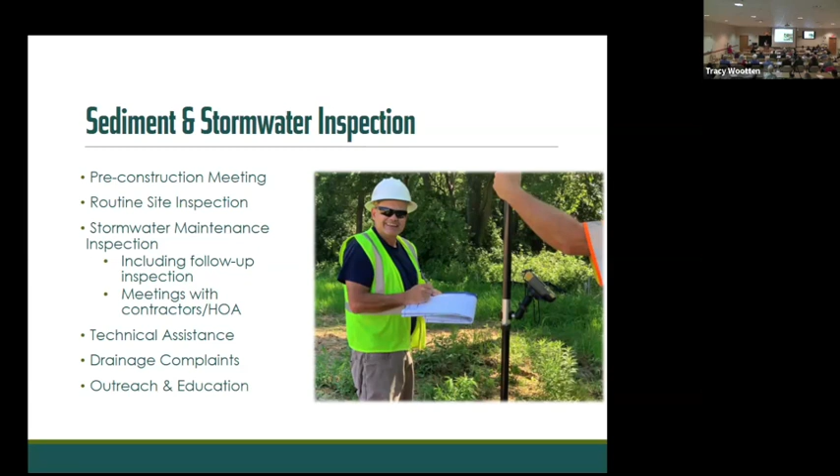And then, like I said, our involvement in a project is from that pre-construction meeting all the way to perpetuity, till we turn it over to you guys. But that construction process, if it's a commercial project, can be a couple months. Like if it's a convenience store, they're usually open in 3 to 6 months. It can be up to 20 years, because we have some projects like the golf course resort communities. I mean, we're still inspecting those projects because they're not fully constructed. And there's different stages, from that initial bulk grading all the way to just building single family homes, but we're still a resource going out there inspecting.

So stormwater maintenance inspection. We don't actually know the total number of stormwater facilities, but we have about 3,000 closed out projects throughout the county, because we're going from 1991 to now inspecting all of those projects. So we're obviously not going to all of these stormwater facilities because we don't have the resources to do that. And honestly, our maintenance inspector is wearing a couple hats at the moment. And so if somebody calls and requests that we do an annual inspection, Buddy Griffith, our maintenance inspector, will come out, we'll do an inspection, and provide you a report.

But really, we encourage you to have a pond maintenance company overseeing that, providing routine and preventive maintenance to you guys, because they're going to be able to monitor it and reach out to us if they have questions. If anything happens, we can come out there and meet with them or a community and discuss what the concerns are.

So there's different types of stormwater facilities. Obviously everybody knows the wet pond, which is just that: a pond that has water in it. But there's also dry ponds, infiltration ponds, bioswales, bioretention, filter strips, even stormwater facilities that are underneath parking lots. So along Route 1, where real estate is very expensive, that Route 1 corridor between Lewes and Rehoboth has the best infiltration in the state, sandy soils, because it's beach. So for a lot of the outlets and different commercial projects, their stormwater is underneath the parking lot.

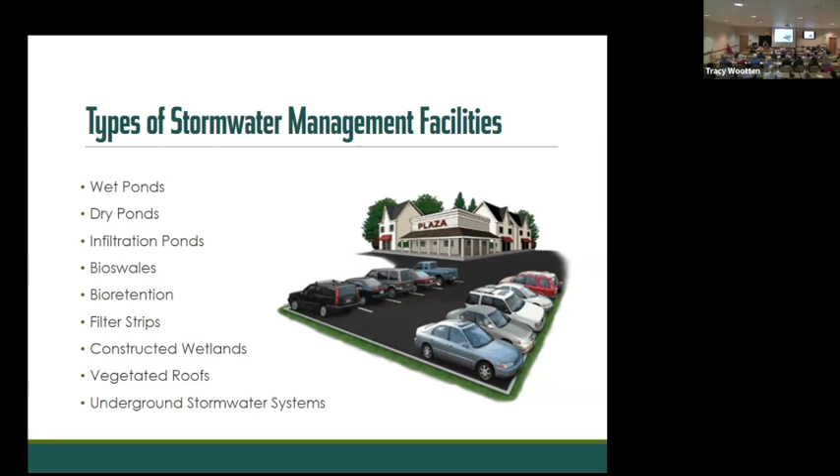So, because a lot of people say, well, I don't know where their stormwater is. Well, it's underneath the parking lot. So there are many different types of stormwater facilities, even vegetated roofs. If you've been to Bethany Blues in Rehoboth, they have a vegetated roof. So there's lots of different ways to comply with the stormwater regulations.

So the first one we're going to talk about is wet ponds, which is really, I think, what most people see in their community, because it's a selling feature. It's an amenity. They need the dirt for the project. So you will have stormwater facilities and they need to comply with the regulations, which is why the pond is there, to mitigate that land use change. But they don't have to make it a wet pond.

Some areas of the county where we have a high water table, Bethany, Millville, Ocean View, you have limited options because groundwater is so high. So in those particular areas, you're pretty much always going to have a wet pond. Rehoboth, Lewes, we have areas with good infiltration. So you could have an infiltration or a dry pond, but a lot of times you'll see the wet ponds just because I think it's more of a selling feature. So how does the pond work?

So a lot of people call us about swales, roadside swale communities. We don't actually have authority over the swales in your community. Most of the roads in Sussex County are privately owned roads, meaning the county is going to inspect that road to comply with county standards. And then once everything is done and they've signed off on the developer, it gets turned over to the community. It is then your road to privately maintain, and that includes the swale system.

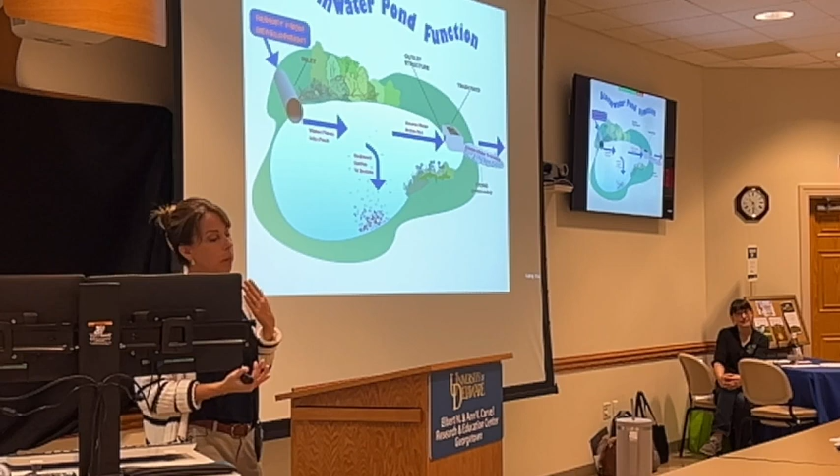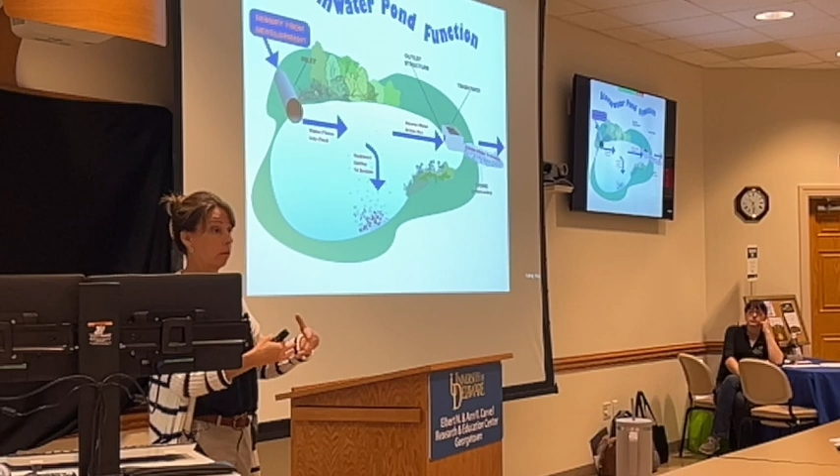A lot of communities are like, I paid for a premium lot view. I want this fountain running. The fountain is not working. I can't see the water. It starts to draw down. So people put pond wells in to regulate a permanent pool. They can do that. There's nothing in the regulations to prevent them from putting a pond well in, where they can have a well that maintains the water, but it shouldn't be going above this low flow orifice. But that also means, if they don't have it regulated, where it's kicking on when it drops low, does that make sense?

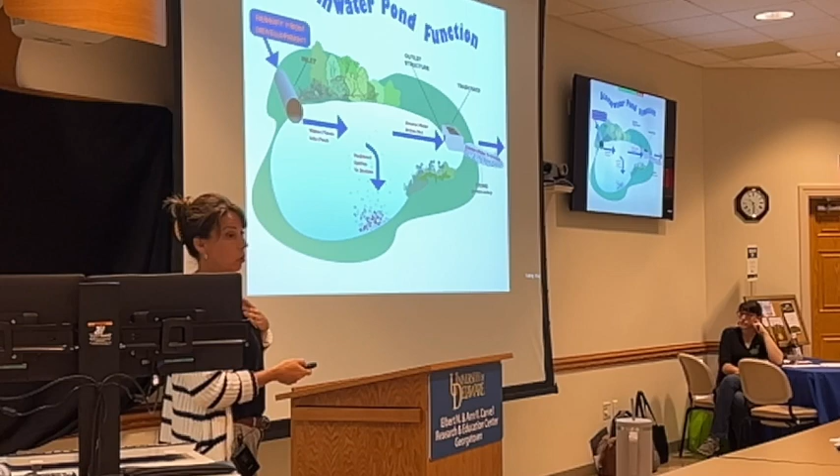Then it's constantly flowing. Because I have some communities that have it connected to their irrigation system, and so it runs just like the irrigation system runs every day, whether it rained or not. And that's really an abuse to the whole intent, and it's changing the hydrology on the receiving end. But that's why people put them in, to maintain the fountains. They want the water view. And it's not something we regulate. So if you call me and say, hey, my neighbor keeps turning the well on, unfortunately, there's not much that I can do with that individual. I just have to educate people, please don't do that.

And so for stormwater maintenance, we kind of talked about the importance of making sure that this outlet structure, so when you go to do an inspection, or if you're walking your dog around the pond or in the area, always look for the outlet structure. It could be a weir wall, just a concrete spillway, or it could be a structure that looks like this, just a concrete box. And there will be openings on that box.

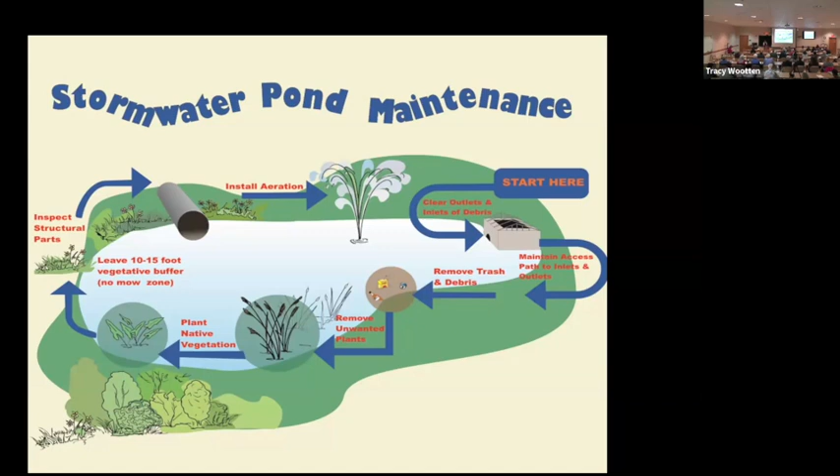Okay, so other things for general maintenance: always look at the outlet structure, always look for debris and trash, maintaining access, no trees around these areas, unwanted vegetation, native plants. We definitely want the buffer; I'll talk about that a little bit more. Monitoring for invasives, always looking for erosion. Our soils here are highly erodible, and catching that early is very important. So routine maintenance.

So when we go out under the stormwater regulations, I'll be honest, in DNREC's world, they don't really care if it's pretty. It just has to be there. It has to function correctly, be vegetated, non-erosive, and in good working condition.

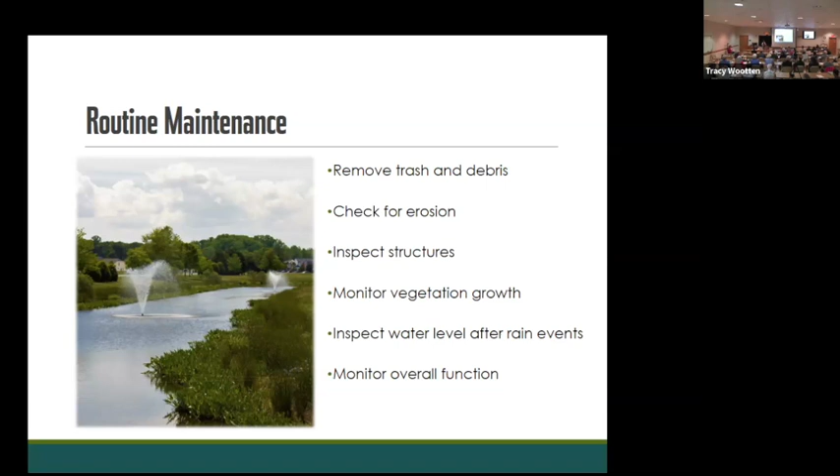But it's not the level of expectation that I think a lot of communities want, because the people will say, well, I picked this lot because they told me there was going to be a fountain. Fountains are not required in the state regulations. Enhanced vegetation is not required. Flowering vegetation is not required. So there's a lot of things that a lot of developers are doing to enhance it, to sell lots. We want that enhancement because we have healthier habitat. So we also are trying to encourage those to do it, but it's not always a developer responsibility.

So removing debris and any kind of trash, those really windy days that we have. If anybody lives in a community that still has active construction, you know what I'm talking about. It would drive me crazy. But if you live in a community where there's houses under construction, we'll get those windy days and that trash is going to go somewhere. We just have to make sure that it's not going to block any kind of pipes or structures. And then we've got the human factor of people trying to do things themselves. So really just keep an eye on your stormwater facilities.

Having a fluctuating water table is not something that's regulated. We talked about that a little bit with the wells. When we have a wet pond design that comes through the office, they have to demonstrate to us how that pond is going to hold water, either naturally or they're going to have to line it. So when a project is submitted to us, there's detailed soils investigations required to demonstrate: will this pond just have groundwater, seasonal high, or does this pond require a liner because it's not holding any water without the liner? So all of that is determined at plan review.

Excuse me, I have another question. Yes. Regarding the evaluation of the soils at that engineer design stage, are those soils subject to being brought in from another site to, in effect, create a liner that would otherwise be, I guess, a rubber or plastic liner? They can do that. So for liners, let's just say that the soil borings come back and they're like, this pond is dry, that's never gonna hold water without a liner.

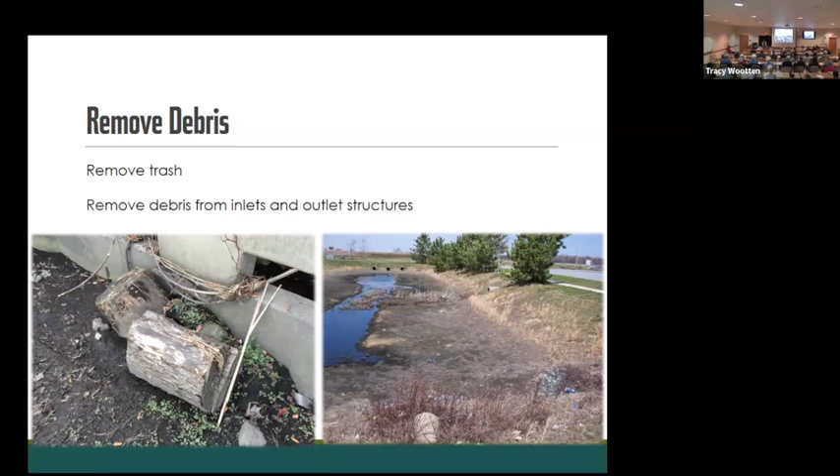Yeah. And then there's certain roads with DelDOT, and I don't know all the ins and outs with DelDOT, but certain roads, depending on that classification, like Route 1 would be one that I think is designed not to flood for like the 50-year. So there's certain roads that they don't want water on for certain storm events, and I don't know what all of those classifications are, but you can have water in the road. During a 100-year storm, you will have water in roadside swales temporarily until it recedes. Yep. Thank you.

So again, trash and debris, if you live in an active construction community or are adjacent to a commercial project, you're going to see construction debris, unfortunately, or trash. You're going to see trash. And then it's windy here at times. So being mindful that it doesn't lodge into any outlet structure is huge.

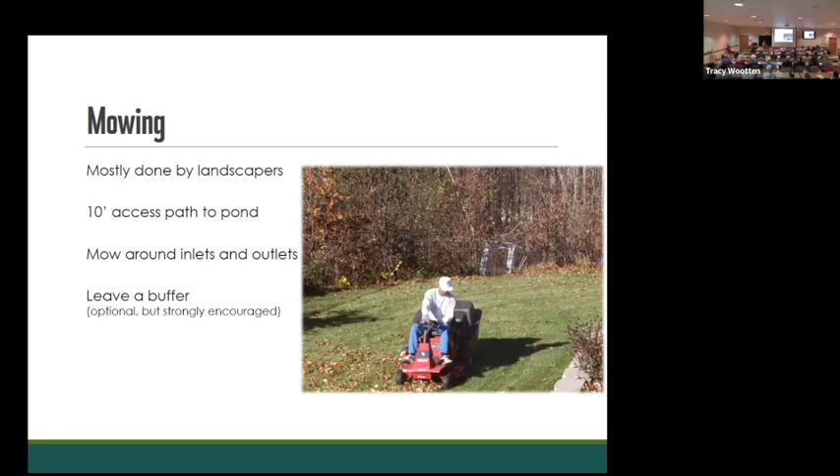Also for any stormwater facility, whether it's a wet pond or not, mowing where the outfall structures, inflow pipes, concrete pipes, outlet structures are, making sure that those areas don't have any kind of woody vegetation. You don't have to mow it on a regular basis. It's just enough where any kind of tree sapling growth is cut. Because you don't want big trees. And the longer you wait for a tree, the more expensive it's going to be to remove it. So if you can catch it early.

Now, this is the big question in a lot of communities, to buffer or not buffer. This is the saga that has continued forever. From the conservation district, we will always support the buffer. The wider you are willing to allow that buffer, the better. Our soils here are highly erodible, so if you mow this on a regular basis and you do not have irrigation, you will have erosion.

That is a guarantee. Just look at this past month, I don't know if we've had any rain this past month, and if that was still on your regular mowing schedule, those pond side slopes, those sandy soils will erode, and you'll start to see where the mower has scalped it. You'll start to see those kind of patches on the stormwater facility. So really, you want to have those areas as no mow, or mowing less frequently.

And even some communities have gone to the extent of enhancement with flowering vegetation, and talk to these guys here that are with us today. Create that pollinator habitat. Granted, I realize it's expensive, but you don't have to do it all in the first year. You guys can budget this stuff. This is really what's ideal. And we've got some communities who've done this.

We have one development that created extensive buffers, no-mow areas. They actually have meetings in their clubhouse with beekeepers. They have a group of beekeepers that comes. I mean, that's full circle. That's what we want, is to take these stormwater facilities, which are there to manage stormwater runoff so that we don't increase flows downstream. They're also there providing water quality, but they are also habitats. And they're supporting ecosystems, and we want to enhance those and educate everybody on the importance of doing this.

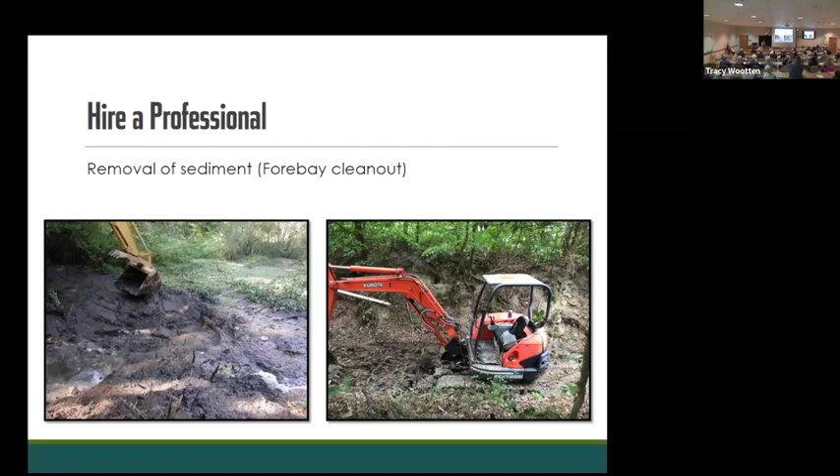So when to hire a professional? I have a lot of communities that call and say, well, I used to do this in this state or that state. Really, you should make sure that you understand the regulations here locally, and not applying pesticides. I had one person who was trying to treat mosquitoes with bleach. I had one person sucking up some kind of small toad, I forget what they're called, with the shop vac. Please call somebody, and know when to hire a professional. Having those licensed individuals come in and know what type of chemical to use, the appropriate equipment to use, and then reaching out to agencies who can help.

This is another big problem that we see in a lot of communities. We'll see these sinkholes. I don't know if anybody in here has seen one in their community. Typically it's where a storm drain pipe will separate from either another pipe or from a catch basin, and you start to get that sinkhole where they keep putting dirt in and it keeps disappearing. Those are things that are pretty common.

Please contact our office or contact a contractor to come in, and you're going to have to fix it. Usually they excavate it out and make the patch and fix all of that so that there's no seepage, water getting through those structures.

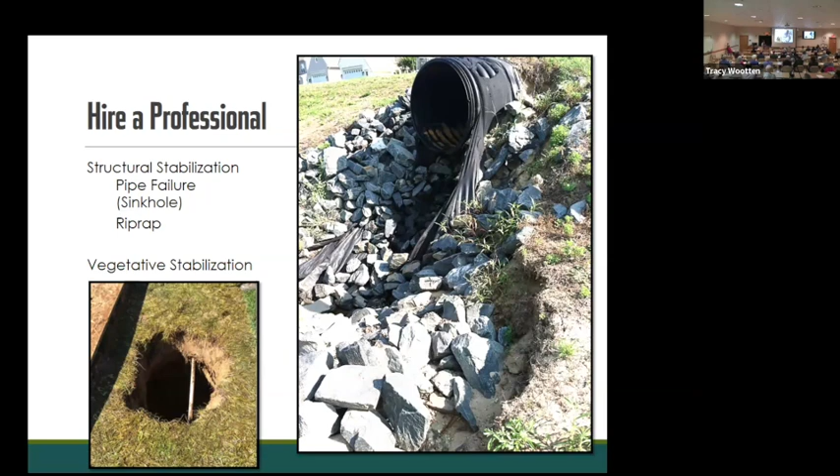Again, erosion is a big thing for us. If you get a storm event that exceeds a 100-year design storm, you're going to have erosion. If there was some type of small erosion there that has started, it is not going to get better. It's not going to fix itself. It will only get worse and get more expensive. So there's significant price tags with all of that. The longer you wait, the more expensive it is. So always take a look at things. If you start to see erosion, like I said, it doesn't get better.

Mosquito control, this is another complaint we get a lot, whether it's the swales or the stormwater facility or their backyard. Mosquitoes are going to be with us forever. It is a free service. They're out of Milford, so we just recommend communities contact them about spraying. I know a lot of the stormwater facilities get stocked with the mosquito fish. Talk to these guys about that as well.

Again, vegetation. For identifying, I use a plant app, which I think is amazing, to identify a lot of things when I don't know what something is. It'll tell me if it's invasive or not. But also you can take samples, and I think, Tracy, they can bring it here, right? And you guys will identify it. Or reach out to your pond maintenance company to see if this is something that's taking over and needs to be managed.

And again, the state regulations don't talk about this. They don't say, hey, you have algae and you have to treat it. They really just talk about the ponds being there to provide quantity and quality treatment because of the land use change in the watershed. They're not really talking about the aesthetics or the enhancement. These are things that we're looking to you guys, as stewards of the land, to take over and enhance and work with experts to do.

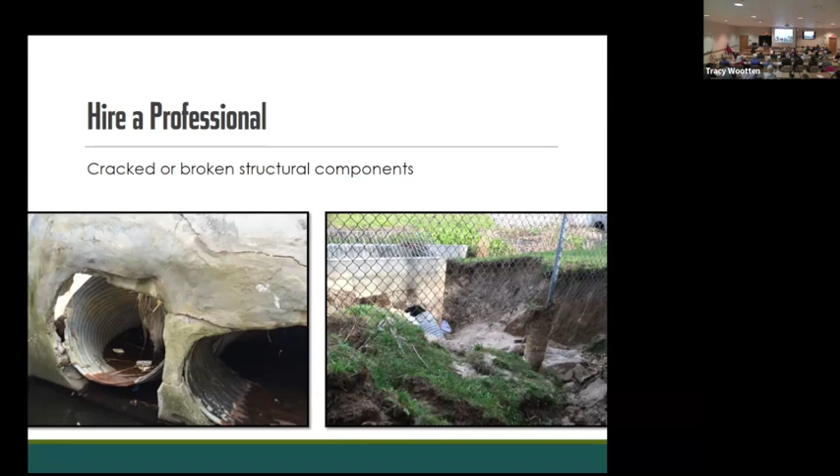So again, hire a professional. I would hope people's stormwater facility would not look like this, forgotten forever. Even vegetation, this didn't have that peaked rack, it was flat, but this can seal off and prevent water from leaving. If the water can't leave, it's going to flood internally. Your roadside swales, storm drains, if the water cannot go out the outlet structure, it's going to back up into the community. And that's what we don't want.

This one, we found it has a low flow orifice in the front, and I think it had a trash bag or something lodged in it. The top of the structure is typically the 100-year overflow. When engineers submit plans to our office, they have to run the 2, 10, and 100-year storm, and typically the 100-year is always the emergency overflow.

Sometimes you have a spillway also, but you can look at this picture and say, I have no capacity in this stormwater facility, because the water is essentially 2.5 feet above where it's supposed to be, which means I have no storage in this entire system for any storm event, because it's going to flood back. So these are things to be very mindful of. The other thing that this does, yes.

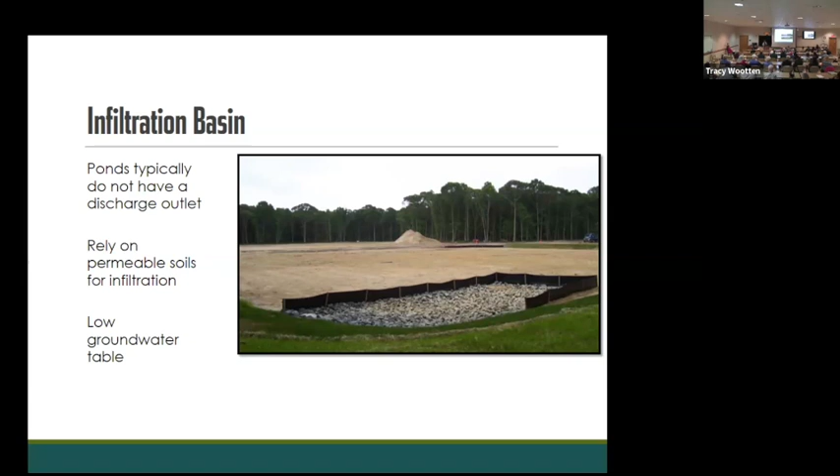But when they're designed, there's all kinds of soil borings that tell us, hey, the seasonal high groundwater is 2 feet below the bottom of that facility. They have to meet a certain infiltration rate. So there are definitely state regulations with certain design parameters required for that type of stormwater project.

Again, this is another type of infiltration facility. I like them planted myself. So I encourage people to plant them because the roots keep the soil more porous and they also take up some of that water. Some areas it's just beach sand, depending on where you are, and it just doesn't support good vegetation.

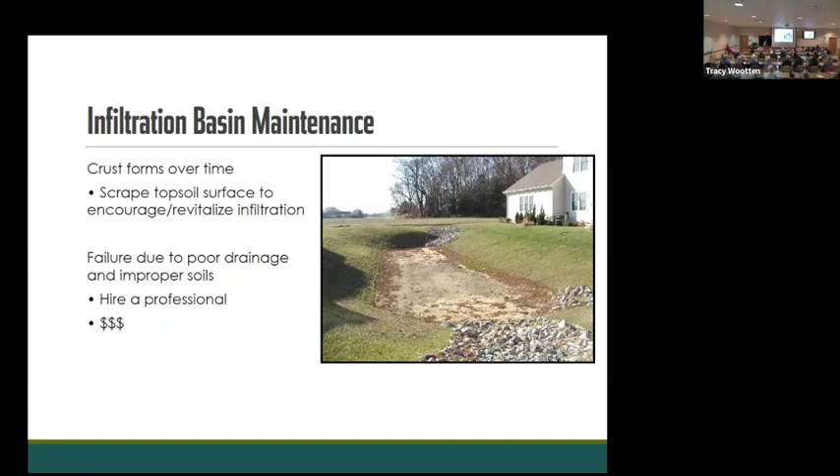Other types of stormwater facilities. We don't have authority over the roadside swales in the community, but every now and then you'll have a swale between the lots that might be pretty substantial. And this is a stormwater feature. They're called bioswales, so they're a little bit different. They're not your roadside swale. They're typically between houses or at the end of a cul-de-sac. They're usually used for filtering runoff for a small upstream drainage area.

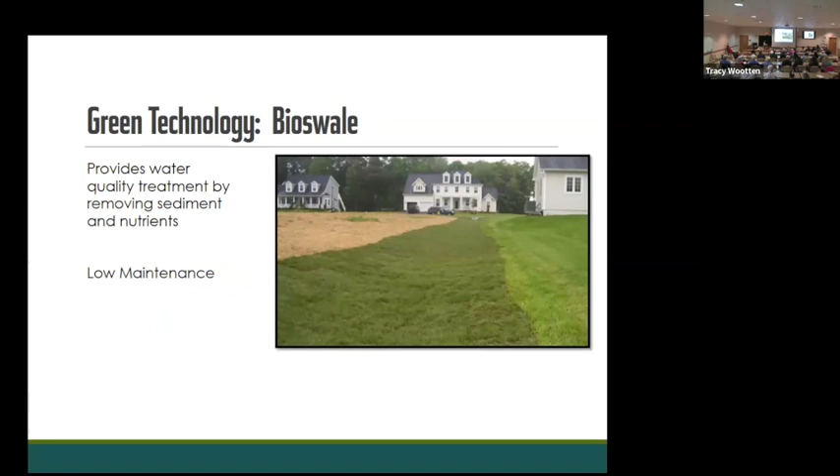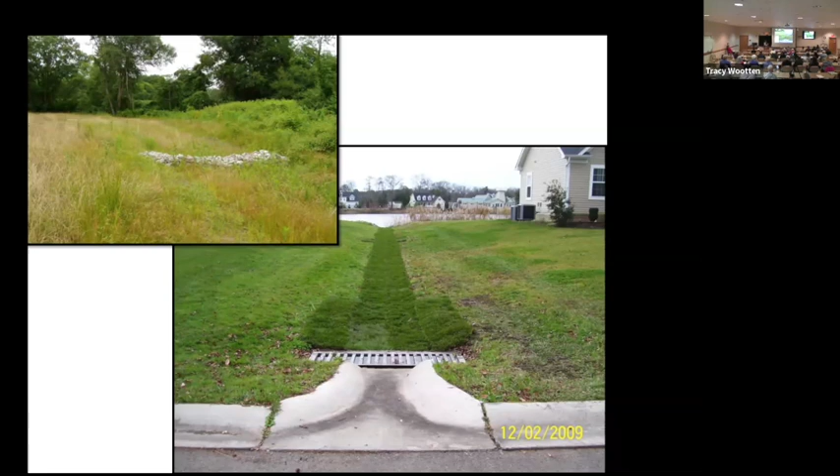And again, this one's between 2 houses. We try to encourage people to enhance them, to create a no-mow zone in those areas so it filters runoff going through it. And we've had some communities where they completely enhanced it with vegetation, or they let it grow up in kind of a meadow condition, where they still mow the sides, but the flow channel itself is kind of a no-mow.

Bioretention. So somebody had talked about rain gardens earlier. Bioretention is very similar to a rain garden, kind of a landscaped depression that is also providing quantity and quality treatment for stormwater runoff. There is maintenance involved in like replacing the mulch. The mulch moves in these areas, unfortunately, depending on the storm event. There is an outlet structure on most of these to collect the larger storm events. But it's just like a garden.

It's an area that's going to have to be maintained. So just another picture. I'll be honest, these were something that I want to say between 2000 to 2014, we would see more of these. We do not see these that much anymore. And why is that? I think it's the maintenance. So they do require a certified soil mixture. The soil mixture is expensive. And I'll be honest, people complain about the bioretention.

So I think developers, they're looking for a feature to sell, and the wet ponds is what they like. And it's easier. Aesthetically, between the two, they like the look of the wet pond, and we can't really say to somebody, hey, we want you to put a bioretention here. They can pick the different type of stormwater that they want to put in these locations as long as it makes sense and they can comply with the regulations. So they can comply with that BMP criteria. So it's their option to figure it out. Okay.

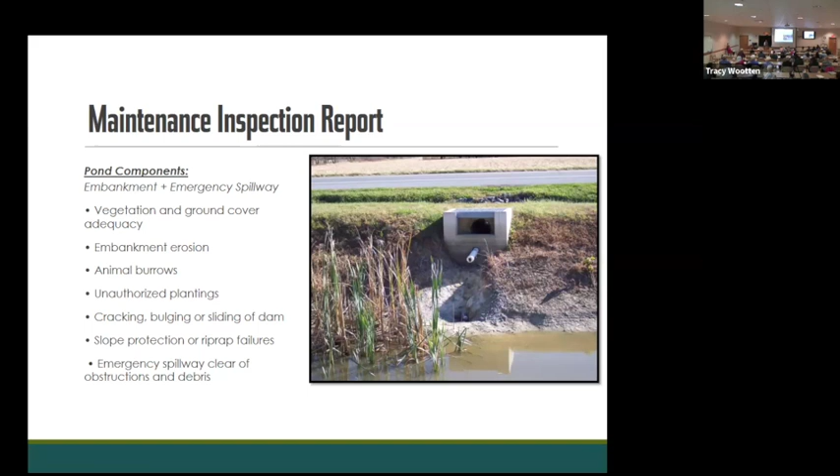Okay, so these are some of the things that we look for when we go out. We're going to look for erosion, invasive vegetation, cracking structures, missing trash racks. We're going to look at all of that when we go out. And like I said, you can contact our office and schedule an appointment and ask us to do a maintenance inspection. That is something that we can do. We are not getting to all the thousands of stormwater facilities throughout the county. I'll be honest, whoever's screaming the loudest seems to be where we're going. We are interviewing for another maintenance inspector right now, so hopefully we can get somebody to help out more.

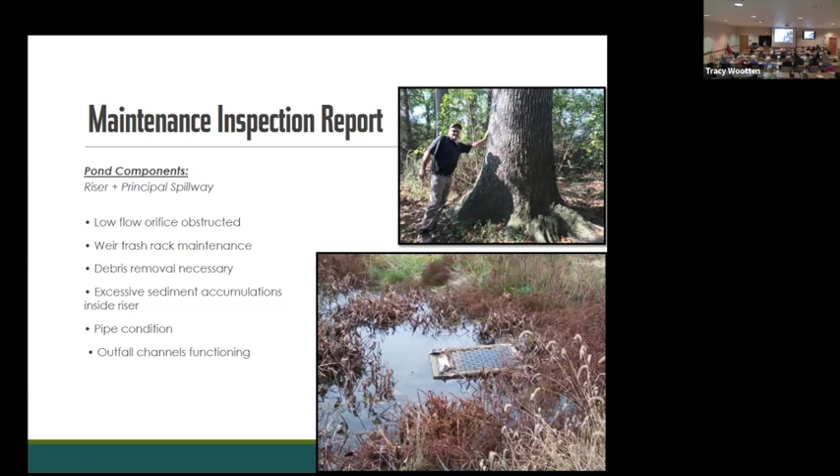So also, like I said, we're looking for obstructions. So we're always going to look at that outlet structure. Is the water where it's supposed to be or below? If not, we've got a problem. It's either with the structure or it's downstream. So those are the big things. We're going to look at the different types of BMP.

Is it functioning correctly? Like I said, this past winter, we had a lot of infiltration facilities that were full of water. Were they functioning correctly? No. They are supposed to be dry. But granted, groundwater was ridiculously high. It was several feet above normal, and we had back-to-back storm events. There's going to be some years that we can't control, and then Mother Nature corrects itself to some degree.

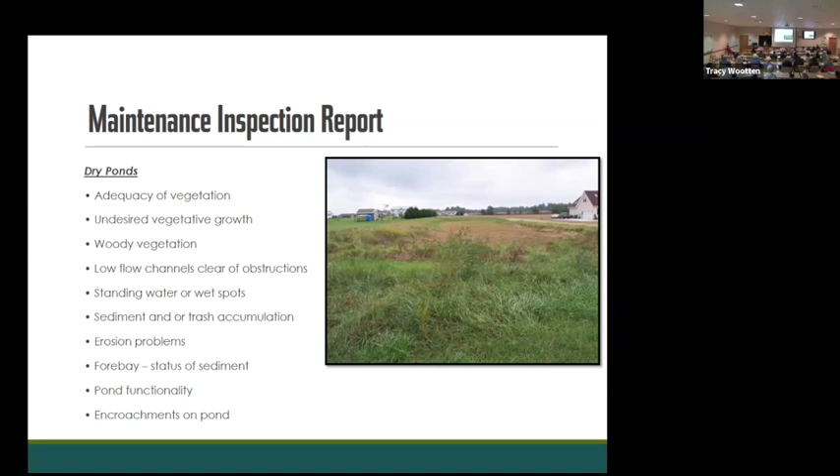So right now, groundwater is really low. So as we go into the winter months, groundwater is down and it'll rise depending on what kind of winter. But there will be times that these do not function or infiltrate within 48 hours. So again, people can contact us for questions. The big thing for us is, we don't want structures to flood. So typically nobody's house should flood. You may be temporarily inconvenienced where water sits longer than you want, but the house itself should be protected.

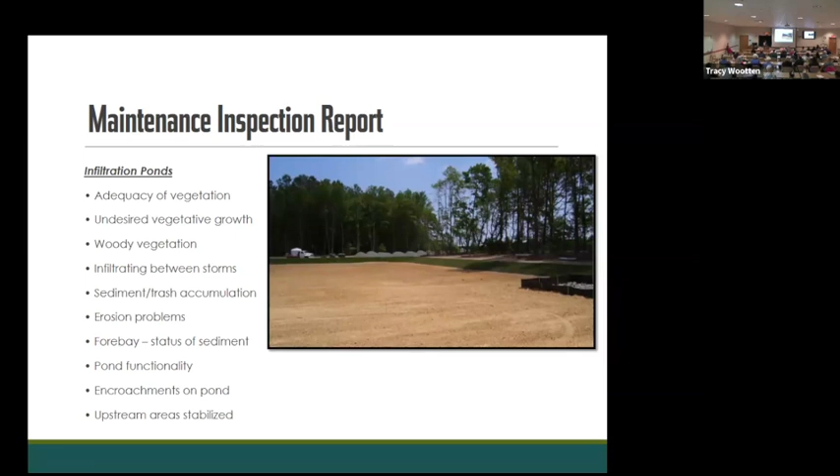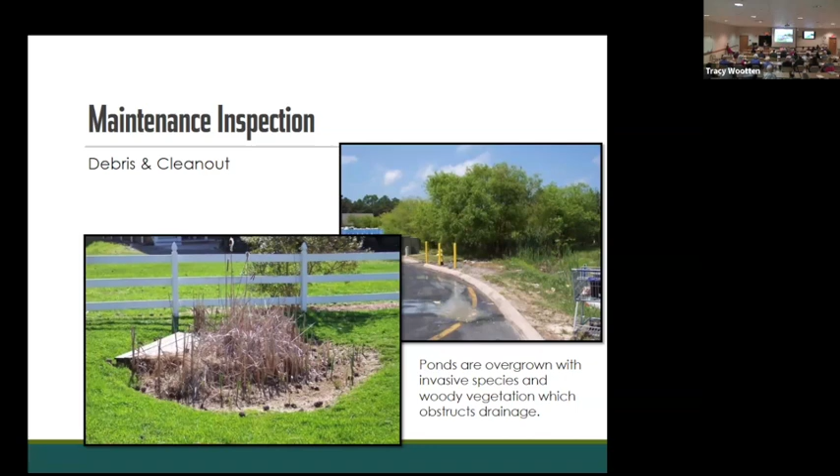So again, making sure that outlet structures aren't obstructed, that those openings are open. Again, this was a stormwater facility that the commercial project didn't even know was there. I think they recovered like a bunch of grocery carts and stuff in here, and they cleaned it up and it was significantly improved. We do have, for communities, the remnant sediment erosion controls that are left. So like inlet protection that's kind of left in some of these grates that have gotten forgotten about, like the backyard catch basin. These are things that we try to make sure are all removed before it gets turned over to a community, but occasionally it gets left.

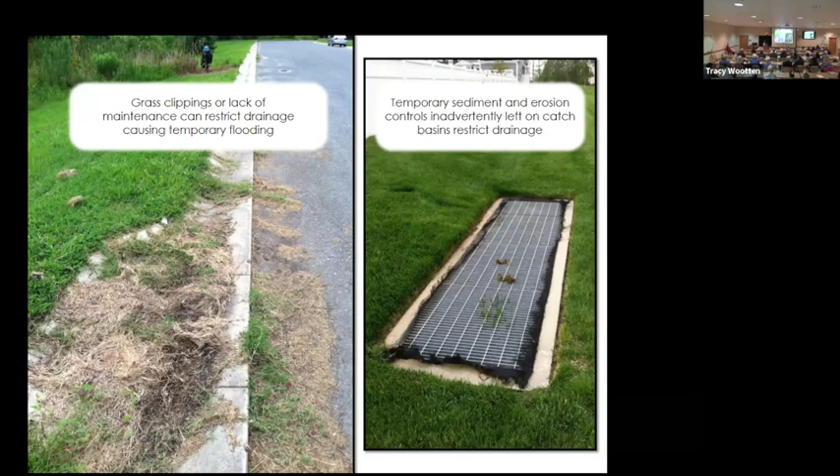So here's the catch basin too, that's underneath all of that grass. So making sure that those areas are open and flowing. Again, and this is the trash rack that I was talking about. If you can see that little rack guard that's in there, that yellow thing. If you have one of those on your outlet structure, they call those rack guards, and it protrudes out the outlet structure, and that is to keep it from being blocked with like cattails and stuff like that.

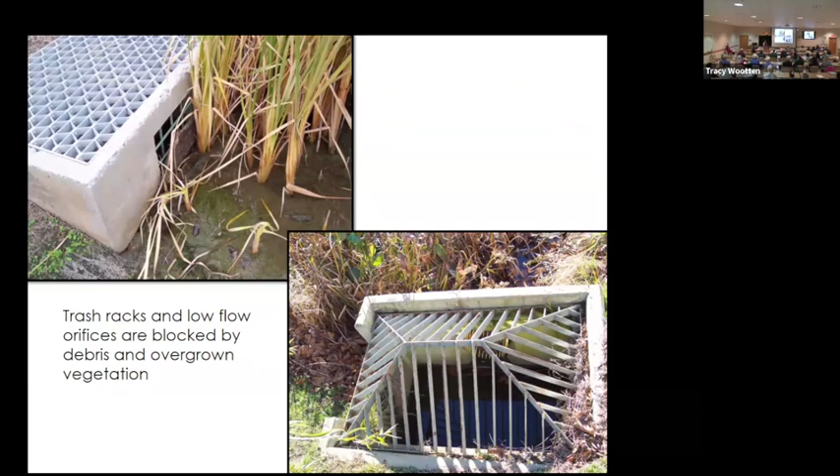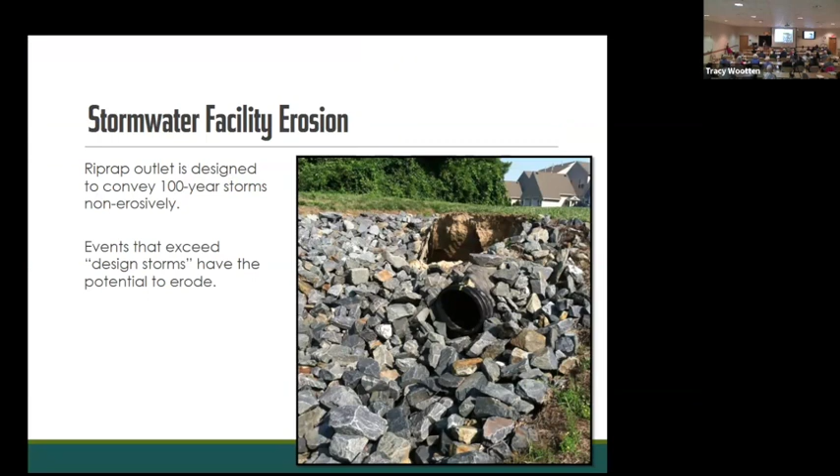Erosion, this is another one. Catching this, really looking at these ponds before a storm event, understanding how they work, and then right after the storm event to see what happened, especially these big events, because nature will find a path, and the longer you wait, the more expensive that is going to be. So again, this started out small and then became a whole monster.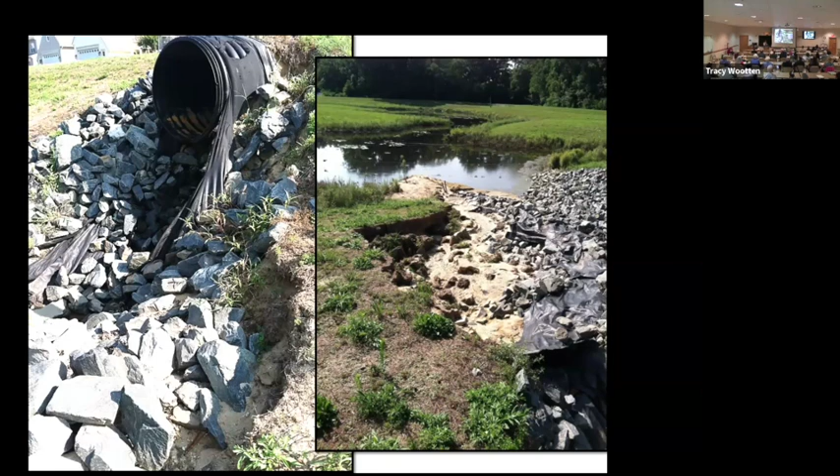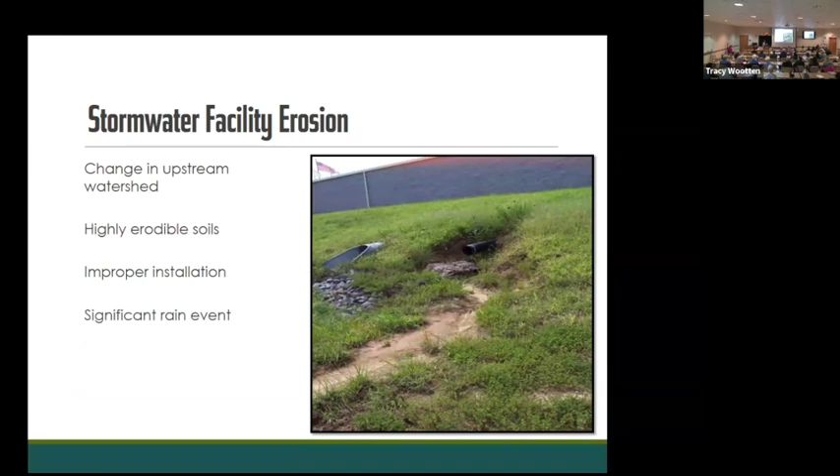So again, our soils naturally here are very sandy, which means highly erodible. And those are things to keep mindful of. And then we have a lot of communities where they put their pop-ups, they'll extend it into the stormwater facility or some type of other pipe. And if there isn't an energy dissipator at the end of that pipe to try to diffuse the velocity, it will become channelized. So just be mindful of that.

Are there any regulations controlling pop-ups? No, we do not. If somebody has gone beyond their property line and gone into HOA ground, we kind of leave it up to the HOA to say either you have to move it or it's acceptable. I mean, really, the water is intended to get to that stormwater facility. So the pond is sized for that house. It's sized for their water. But if it's a concentrated flow that's going to cause erosion, then the HOA could be picking up the bill for that.

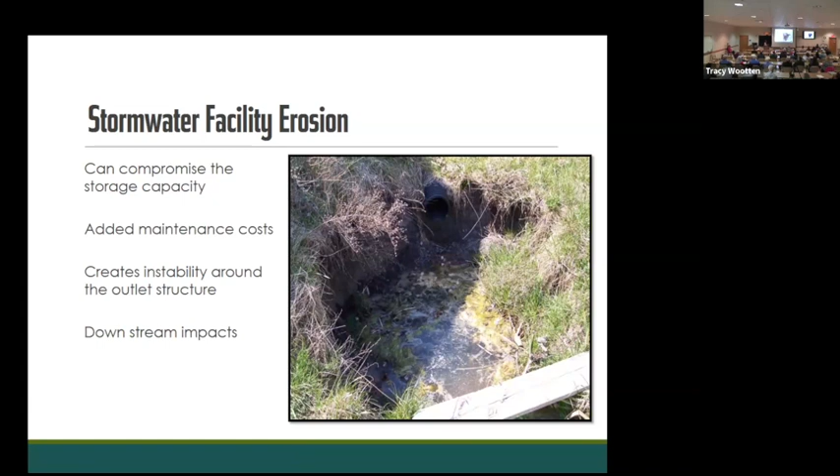Just more erosion pictures. This is a dry pond design. And then this just kind of shows, I think this was Milford Hospital. They came back and put an underdrain system and did kind of like a floodplain planting and stuff. So if there's some eyesores in your community and you have funding, there are options to improve it.

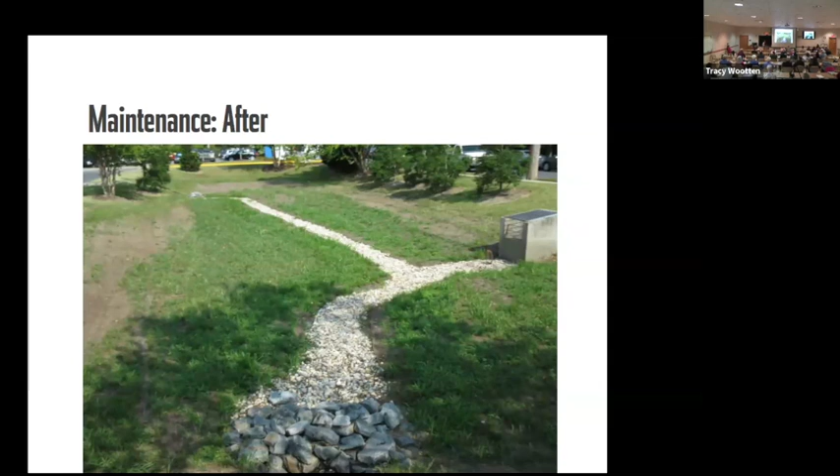Again, waiting too long, these become very expensive price tags if the flow becomes channelized. And really, a lot of this stuff, we try to catch it before it's turned over to a community. So we'll walk with a lot of the HOAs. A lot of times the community will have questions, and I don't live there. So myself, inspectors will come out and we'll walk the development with you and talk to you about how it's supposed to work, what we see. And a lot of this is before turnover. So we type up that punch list and give it to the developer.

Sometimes not all of the items that the community wants are on that punch list because I can't make them put a fountain in, I can't make them put a well, but we can fix the erosion so it's turned over in good working condition to the HOA. Again, sediment: if you have a community that's under construction, there's going to be sediment from construction vehicles. It should be collected in the forebay initially, and then we try to clean that up before turnover if there's enough sediment in that forebay.

So removing trash and debris, we talked about that. Managing invasives, like Phragmites. If you have the start of it, definitely work with your pond maintenance company, because depending on the scale of it, that could be a 3-year treatment plan as opposed to something that you could nip in the bud early.